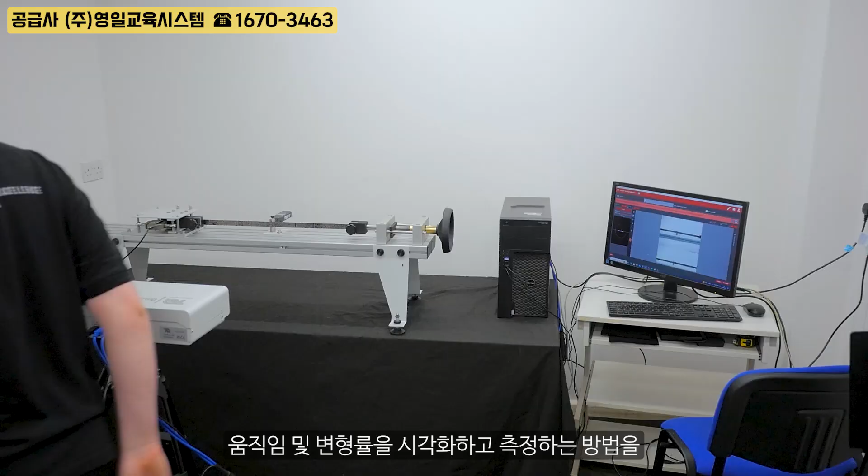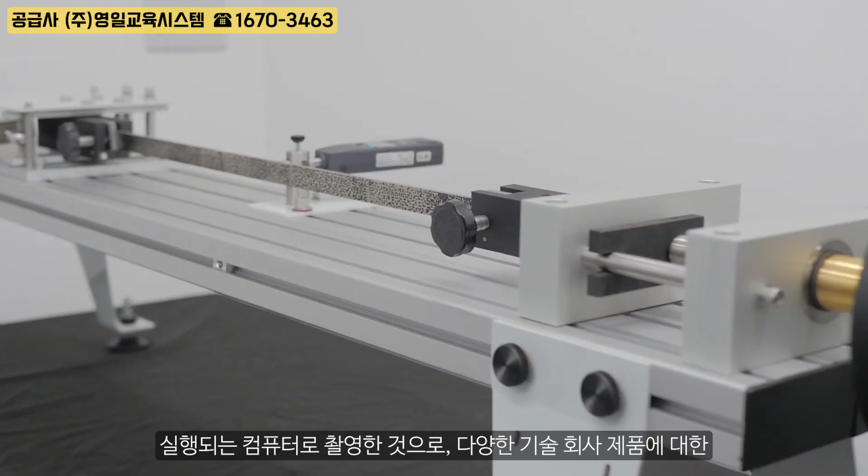DefleX 3D is an entry-level digital image correlation system used to teach students how to visualize and measure deformations, displacements, motions, and strains. With the 3D camera, the images captured are computed with the DefleX software that uses digital image correlation (DIC) principles to evaluate the results of tests such as tensile, bending, and torsion in real time on a variety of TecQuipment products. The data gathered can then be visualized in the software in the form of vectors, color maps, and a 3D graphic showing the shape of the deformation.

This allows students to physically see the processes taking place in real time, especially useful in visualizing processes that normally must be inferred, such as bending moments on a beam under load.

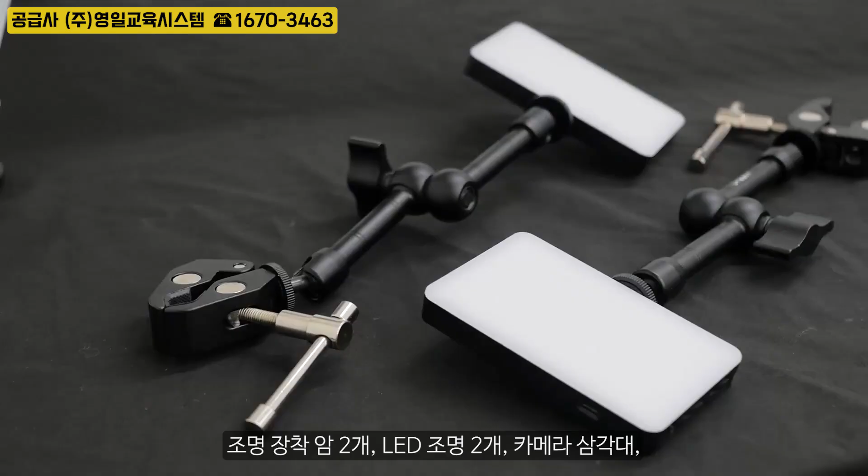When purchased, you're provided with a camera system, 4 lenses - 2 12mm and 2 25mm - a USB hasp and flash drive, black backdrop, 2 light mounting arms, 2 LED lights, camera tripod, black and white marker pens, and 3 DefleX calibration grids in small, medium, and large.

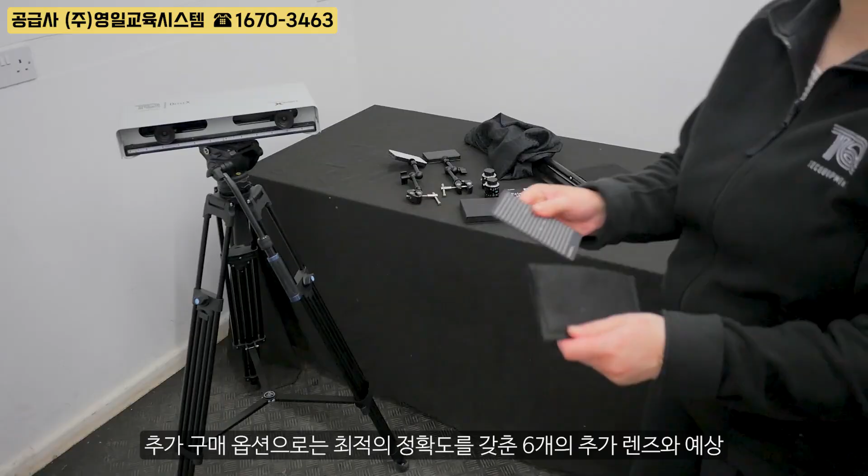Additional purchase options available include 6 additional lenses which optimize accuracy, a DefleX starter kit, and a DIC speckling kit.

Cased inside the rectangular main DefleX unit are the cameras, each with a resolution of 6.3 megapixels and a relay for light control. If required, underneath the unit is a screw hole which can be used to attach the unit onto the tripod's base plate. This can then be used to place the unit at the desired distance to perform the measurements.

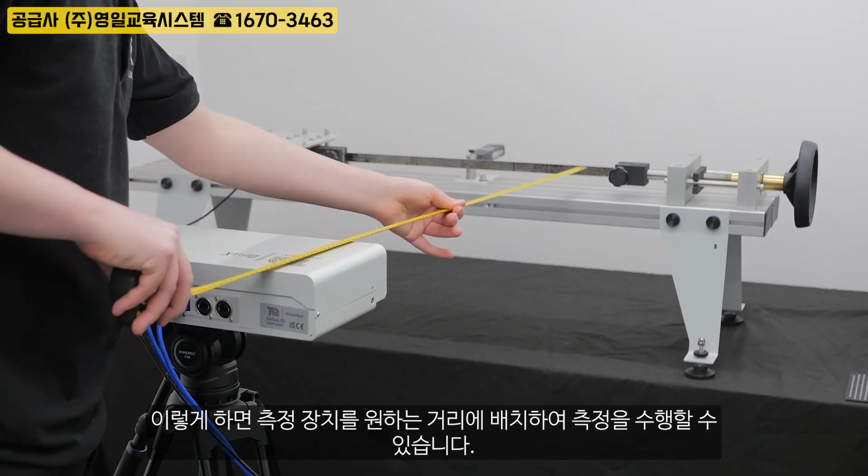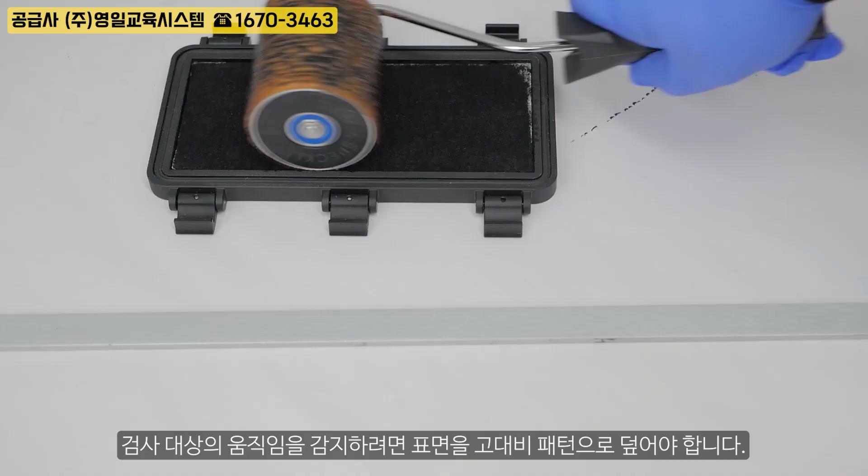For the cameras to work properly, the system needs to be well focused and the aperture needs to be set according to the lighting conditions. For the camera to detect movement in the specimen being examined, it is necessary for the surface to be covered in a high contrast pattern. This creates a unique feature in the image for the software to track.

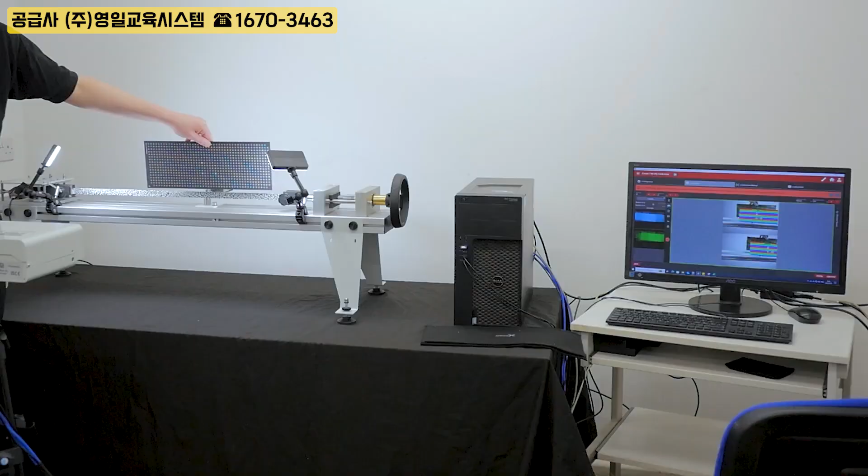The DefleX 3D software will need to be downloaded onto a suitable computer. When logged into the system, you'll be able to calibrate, test, and analyze your experiment. Calibrating the system is essential to be able to measure anything. Calibration tells the camera the scale of the specimen, the distance to the specimen, and the specimen's orientation and positioning.

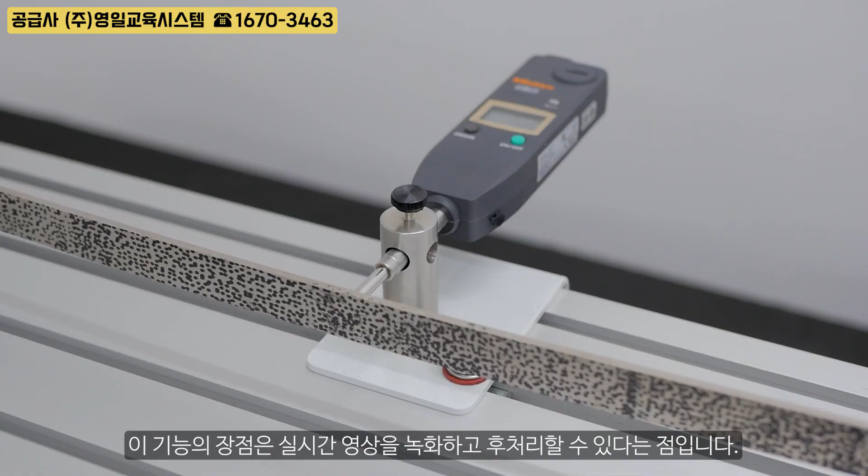Using DefleX 3D is as simple as preparing a specimen, recording footage, and analyzing the data. The advantage is the ability to record live footage and use post-process. This records the footage and saves it directly to the computer, where you can apply as many probes as you like to your recording. All the data collected can be exported into Excel for further analysis. You can review or edit your footage multiple times and analyze the data whenever, wherever.

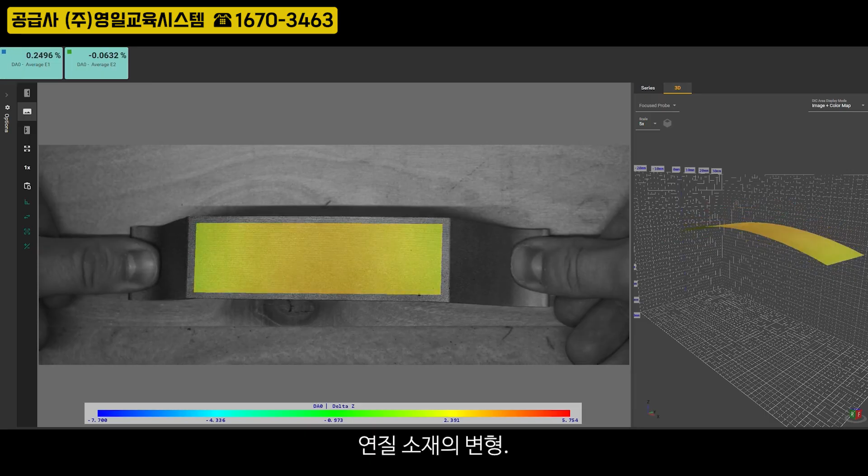DefleX 3D can be used to visualize material behaviors under pressure, component testing when subject to tensile load, soft material deformations, component responses to external vibration, columns or struts reacting under axial compression, and strain concentration areas for optimizing durability and reliability.

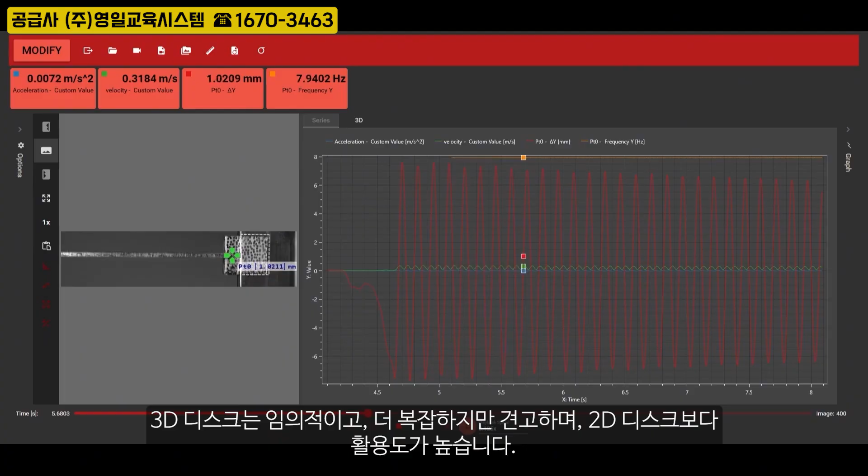In most industry applications, 3D DIC is normally preferred because 2D DIC requires a purely planar test piece to obtain precise results. 3D DIC is arbitrary, more complex, but robust and has increased versatility over 2D DIC.

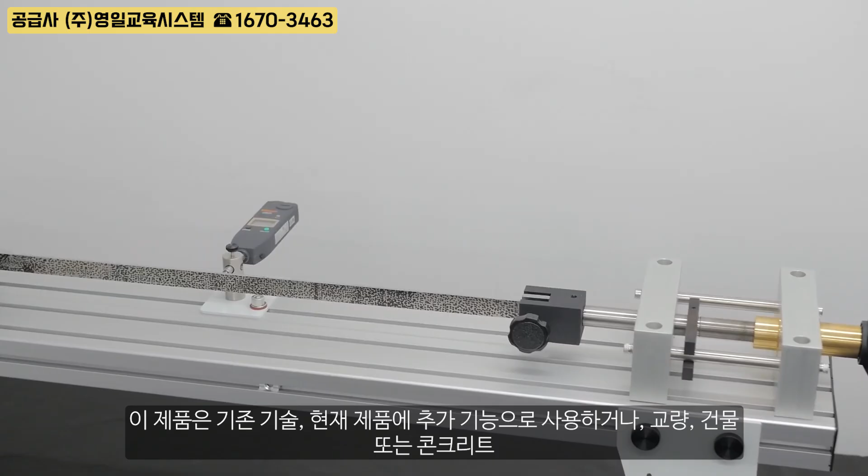DefleX 3D is a great tool for visual learners and teaches students about the DIC technique. It can be used as an add-on to existing TecQuipment products, or as its own standalone product that can be used anywhere, like outside on bridges, buildings, or concrete structures.

So, whether you're looking to revolutionize your teaching methods, or to create interactive, engaging lessons, DefleX 3D is the visualization tool you've been searching for.